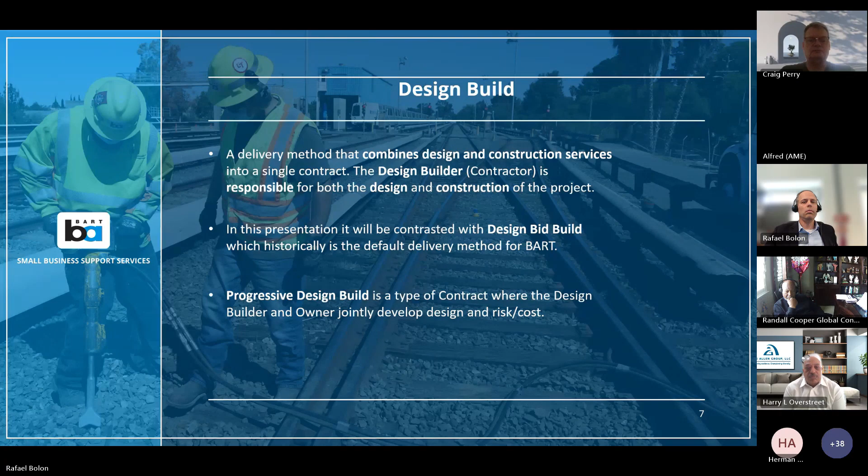At a high level, the biggest difference between design build and design bid build is the scope that goes out to be performed by the contractor or design builder. At the top, you have design bid build, a conventional timeline where design is performed, usually with a separate consultant, starting typically around 35% all the way through issue for bid. That support might extend further through bid and award and even into design services during construction, but there's a break when it goes into bid and award. For design bid build, these are typically hard bids, sealed envelope type bids, where it goes to the lowest responsible bidder, and then you have the construction phase.

So this is the model that we're all used to. Below is the design build model, where design may only progress to no more than 35%.

Now, that could vary depending on the subtype. For instance, at BART, there are certain elements, particularly in communication and train control, where the interfaces are specialized, and therefore the design might extend up to say 65%. But much further than that, and you lose the benefit of a design build, and it just becomes a design bid build. So somewhere around 15 to 35 design, a longer bid and award.

If you look at the orange bar below, it's actually longer in the second one. And that's on purpose, because in this model you typically have a two-stage process. You'll have a best value or pre-qualification phase, and then you have a BAFO, a best and final offer phase, where the owner negotiates on price.

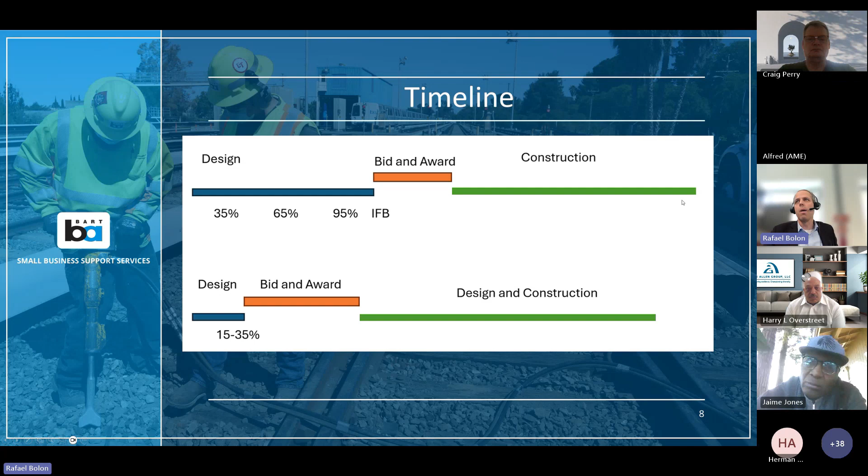And then, of course, the green bar is longer because it includes both the finalization of the design and the construction. Those are not start-stop; there's some overlap that is implicit in this design method. The punchline, though, is that if you look at the bottom, it ends sooner. That's really the main driver for why owners do it - it's a schedule-driven advantage.

So let's talk specifically about progressive design build. How does that differ? In progressive design build, the owner will bring the DB firm in early to assist with the design. In the conventional design build, the owner hires an outside consultant to take the design through the 35% phase, let's say, and then hands it off to a design builder. In progressive design build, the DB is involved earlier, and it's an iterative process with the owner to actually develop the scope and also typically the budget for those packages.

So the added advantage is that you get input as to where those risk areas are, not just from the owner's perspective, but also from the constructor's perspective. Ideally you get better alignment between the price of these packages and the scope, but it also allows more flexibility to the owner if they're not actually sure what the design is going to look like - this model gives them that advantage.

So then you have two packages. You have a pre-construction package, which is essentially the owner hiring the DB firm to take the design to some point. And then you have a final series of packages, which would be the actual construction. Whereas in the conventional model, it's one contract that would span both design and build, as we showed before.

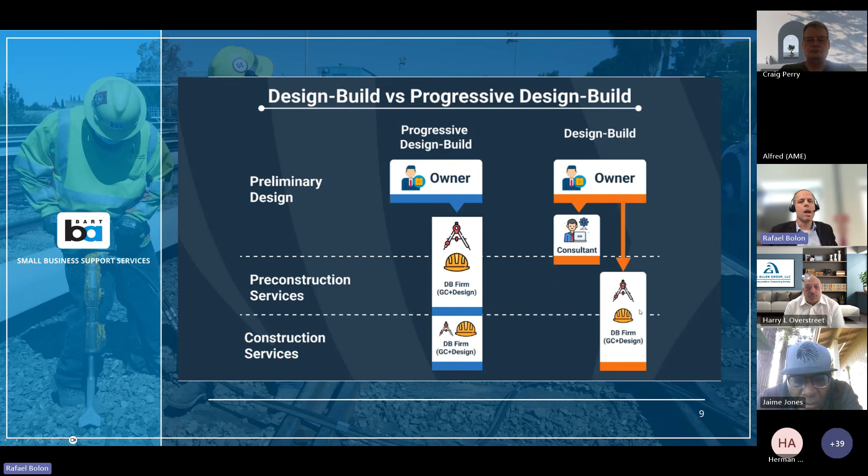So why would owners do it? The main one we talked about is schedule. If you look at the total life cycle, design build can be, or is intended to be, quicker than design bid build. You have to look at the whole life cycle - if you just look at the design build contract itself, by definition it's not quicker because it includes design elements. But if you look at the life cycle, that's the main advantage.

Cost, sometimes - and we'll talk a little bit about why sometimes - but in general, contractors typically have better, faster, smarter ways to do things. And so their means and methods can be incorporated into the design in a way that they can't on a hard bid. But the reverse can also be true.

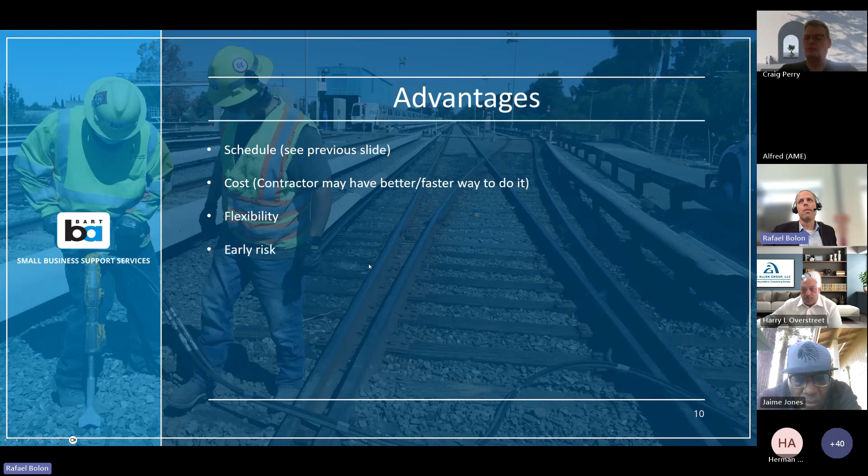We talked about flexibility. In particular, in progressive design, it allows a lot more flexibility in the design. The owner doesn't need to know on day one what they want; they just need to know what they want to achieve. And then they'll work with the design builder and the consultants to try to develop that. And then we talked about risk identification - again, this is a progressive design build specialty - but by identifying those earlier, you can work with the funding to develop separate packages of risk, or even tie your risk register to your budget better than you do in design bid build.

So for the rest of the presentation, I'm really just going to focus on the so what - like, how does this make my life different as an aspiring BART consultant? I'm going to focus on the processes that we do here at BART, on the CM, DSDC, design, etc., and talk about what is different about working in a design build environment versus a design bid build. Remember that the contrast is always back to the conventional. I'll go through some examples, and then we'll have time for questions at the end.

So the first and most obvious one we've chatted about, but just to say it because it's there - obviously the overall scope for the consultant is different. There's still a design element, a pure design element, where the owner may require an outside designer, but remember that's only typically 15 to 35%, sometimes as much as 65% for specialized scope. There's still a need for CM, for construction management, and this would be through the life cycle of design and build.

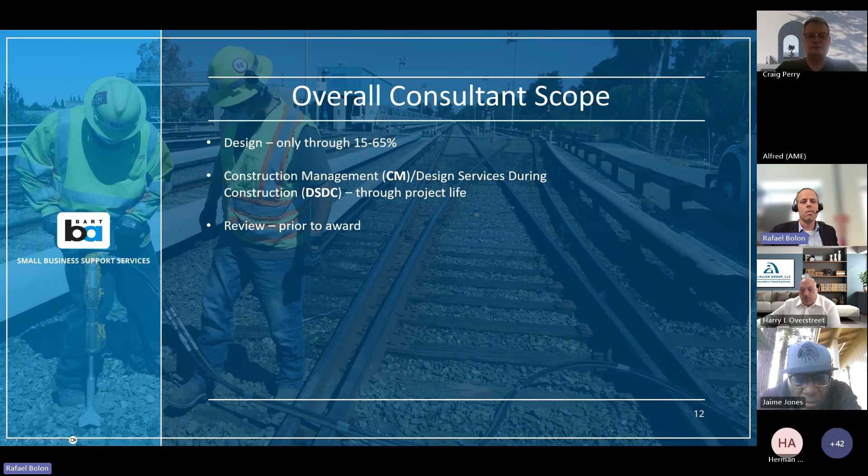So a little bit different from where it's bifurcated. Likewise with DSDC, design services during construction, the owner still has need for a representative to respond to submittals and RFIs, et cetera. BART is moving more towards a model where they have a third consultant come in to do review. That could be any version of the above - it could span just the beginning portion, the whole phase, or go through the bid and award phase. There's different ways that could happen, but that's a new thing BART is really pushing, so be aware of that as well.

So let's start with the pay process. Overall, the pay process on DB is the same - you have monthly invoices that come in from the contractor, you have to look at what they did that month, make sure it's in a correct format for BART payment, and get it through the system. What's different is because the scope wouldn't necessarily be known at award, you tend to see more lump sum values than in design bid build. So it's incumbent on us to break those down into smaller chunks, and we'll talk about that in a second.

There's also going to be payment for design type items. Most of the time we're pretty good at doing estimates for things like concrete and rebar, but it's trickier when you get into design items, because now you're talking level of effort type stuff where a lot of the work may have happened before you actually see a deliverable. Even more so, items like project management or mobilization really are level of effort type stuff - they're more time based than thing based.

Some items in design build might be unit prices. It's not uncommon that an owner will put out an estimated quantity - for instance, on my contract we have estimates of conduit, so those are just plug numbers where you assume 5,000 feet of this type of conduit. That's relatively easy to track because it's on a linear foot basis. But most will be lump sum, as we've talked about, and they may also include items such as quality or PM that will have to be worked out, whether time phased or thing phased.

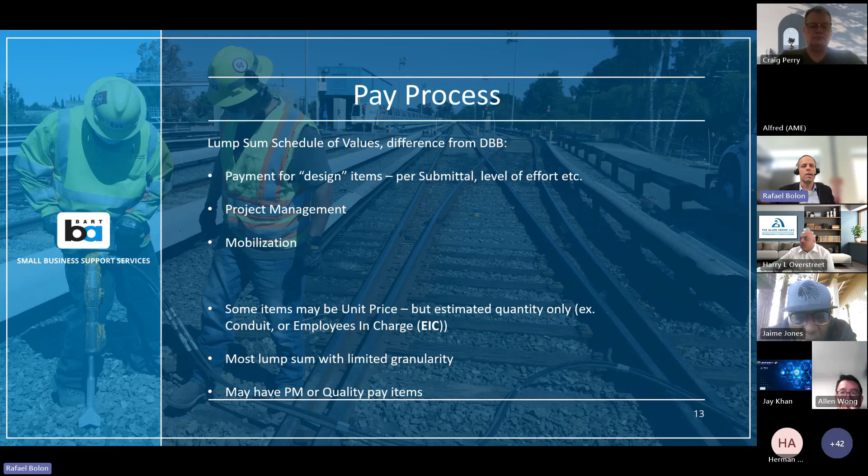So as an example, I mentioned how these are typically lump sum. Here's an example from a project I'm working on at BART right now, where we have a single line item which is really just installation of equipment in a train control house - just one number associated with it. But in reality this is going to get broken down into subsets: the location of the house, the type of work being performed, the phase on the project. The order of those three could vary, but in general, where it is, what it is, when it is are the three things you'd use to break it down. Here's an example where we broke it down based on locations, and inside this there'll be another level even below that where we start getting into the type of equipment. So it starts at a relatively high level but very quickly becomes much more granular.

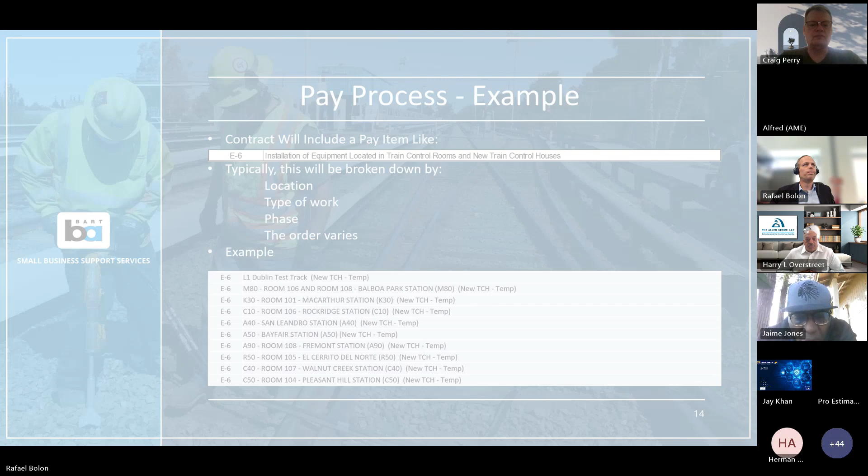Another big differentiator is quality. In design build, typically the design builder is both the quality control and the quality assurance. This is a marked difference from the way BART runs design bid build, where the CM would be the quality assurance and the actual contractor would be the quality control. So there's still a role for consultants in this situation because someone has to oversee that and ensure it's being done right. There's also typically audits that are performed, and sometimes those audits even extend to the BART team - we might do self audits, as we call it, and make sure we're doing things right. So there's still a role for the CM to monitor and provide oversight.

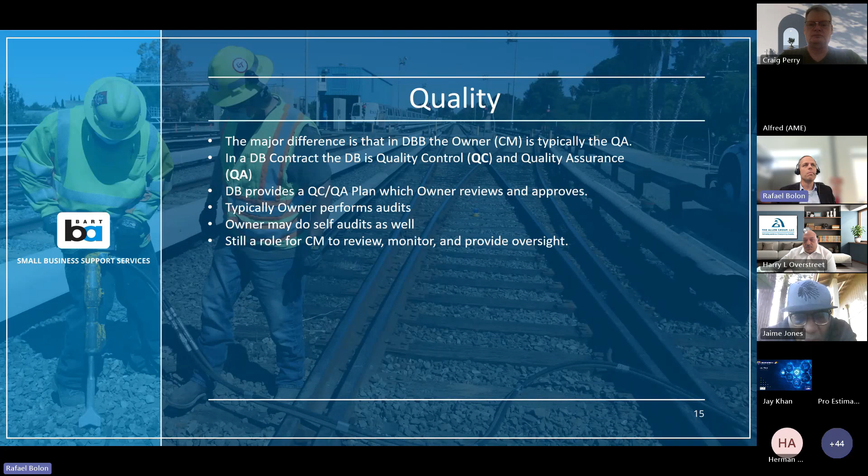So as an example, I listed the takeaways in terms of type of work that would exist in the quality sphere given that breakdown. Even though the DB produces the overall QC/QA plan, someone's got to look at it and make sure it's good, because that's the thing we're going to build off of. There's a design review, and stuff in the field - I'll use the example of concrete where there's a QC role, but there's also typically a QA role in terms of casting cylinders. Someone's got to ensure that happens and is done correctly, up to and including maybe some field verification, so there's some opening for field review as well.

We may do oversight to confirm that QC and QA are doing what they're doing. Both the consultants, BART, and the DB can issue NCRs. So those processes exist and require consultant support. And then, as I mentioned, there's audits—self audits and external audits—just to ensure everybody's doing what they're supposed to do.

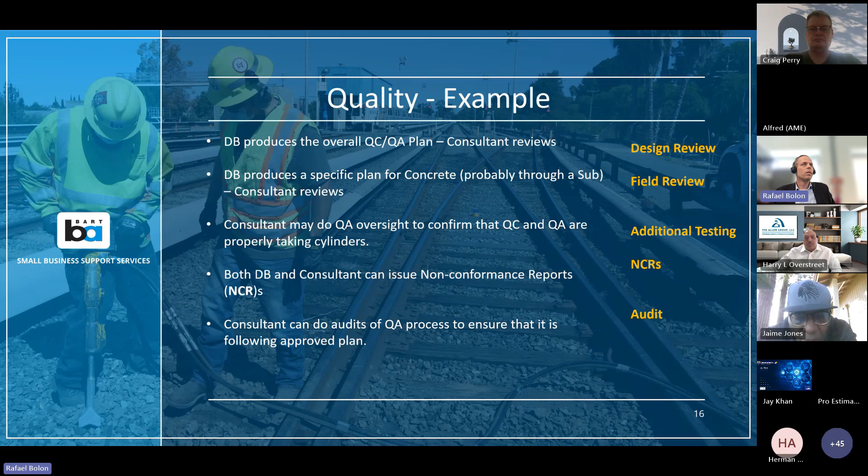So let's talk about the change process. That's another really big differentiator. Two big differentiators, actually. One is because now you have both construction and design work, there's really two sets of BART provisions for changing the contract.

There's the one most of us are probably familiar with, what some people call force account, or time and material is another way people refer to it. That's a very prescriptive set of specs in the GCs that tell you what prevailing wage is, what the prescribed fringes are, what the allowable markups are. These are all very standard things.

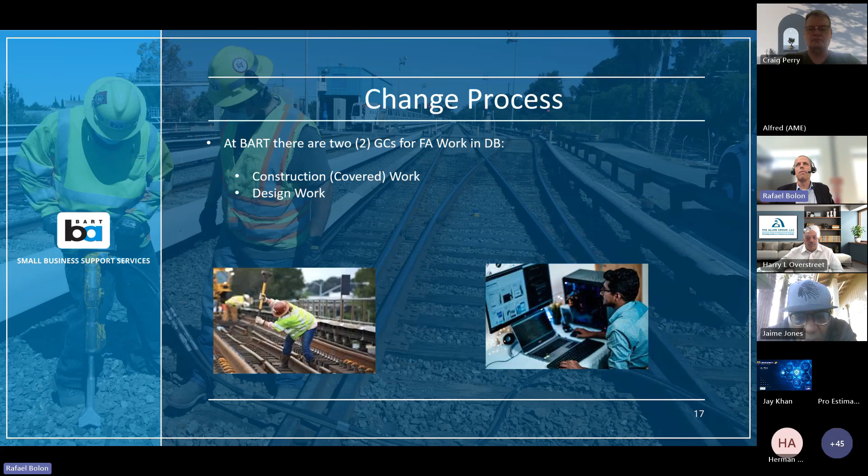When it comes to design work, it's more complicated—not the least of which is because we're typically not in a designer's office with a stopwatch counting them, as we would be out in the field. So that's just a differentiator.

The other thing is, remember how a lot of these items are not going to have specific quantities at bid day? You're not going to have a set of plans day one that tell you you have to pour 5,200 yards of concrete. You're going to have a performance-based requirement that there be a footing sufficient to hold this equipment. Only later will you know that it's 5,200 yards of concrete.

And so changes are trickier. If you add something, you're not going to be able to just do a takeoff and see what that add is. So changes in quantities are less common, and changes are a little harder to quantify than they are in design bid build.

That extends to the very definition of a change. In general, design build specifications, when properly created, are performance based. So essentially, BART is saying what they want, not how to do it. And that's on purpose, because that's what they're paying for—they're paying for the expertise to translate that into action.

But they have to be very careful, because if I, as an owner, say that I want a four-wheeled vehicle, I may be thinking of a Chevrolet, but I might get a skateboard, which is also a four-wheeled vehicle. So changes are trickier, because you have to really understand what the contract required, not just what you wanted, and then see if this is a change or not a change to the contract.

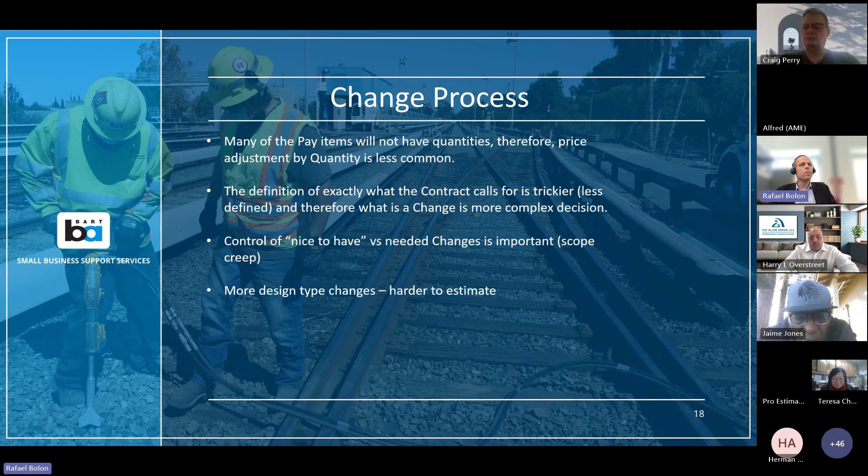So here's an example, right? And this is on a systems-based contract, which makes it even trickier, because in systems-based contracts, a lot of the upfront work is behind a curtain. So again, much closer to the designer behind a computer screen than the pouring concrete model. So in this model...

It's often useful to break those change orders into two. This is something I've used successfully at BART, which is you do a not-to-exceed change for essentially advancing the design to a certain point. And then you can do a lump sum change order for the agreed scope once you have it. So this works when you know there's a problem, but you don't really know what the solution is.

And then this is another one that I've used. This wasn't at BART, it was at another railroad, but a similar idea - we had a design build where we had, in this case, thousands of foundations for an overhead catenary system. We were switching from a diesel to an electrified system, and as you can imagine, you get all kinds of issues with the footing, where the soil is soft, soil is too hard, what have you. So we came up with predefined or grouped solutions. So in the case of footings, you could say, here's a pre-approved solution with a casing. Here's a pre-approved solution for tight access, where you have a different type of footing. And it won't catch everything, but in many cases, if you agree up front, the time is generally more expensive than the cost of a little bit of extra concrete.

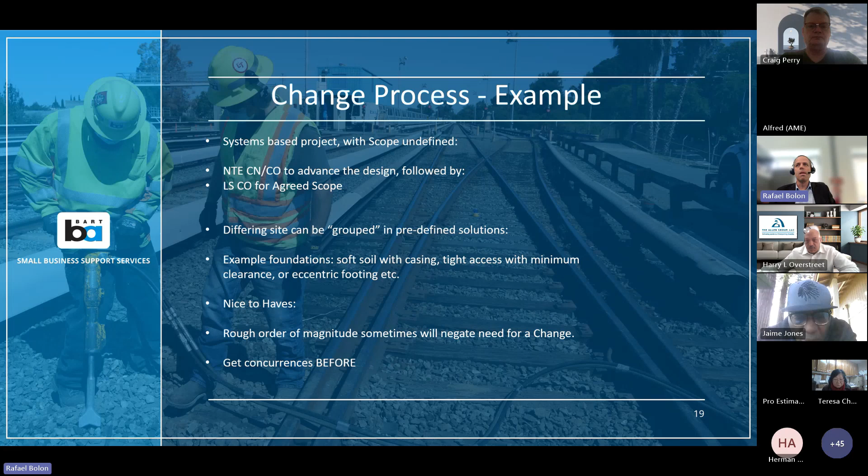Submittals - the big difference there is that submittals are not going to all be listed. They're not going to be all called out. You probably don't even know where all the submittals are. Secondly, the submittals will have different levels of completion. So in a design bid build, you typically see the submittal once, maybe make comments, then you see it again and you approve it and you move on. In design builds, you're going to see it at various levels - it could be 35, it could be 65. That's a big differentiator, and we'll talk about that a little bit when we go through document control. It's an important part of making sure your documents are in order.

One thing to note is that depending on the model of who the design builder is, sometimes they have their own designer. Sometimes they'll have the equivalent of a GC, an AECOM, an HNTB, or somebody like that. In which case, there may be a lot more design changes than we're typically used to. So if the design builder controls access to the designer and not BART, then very often you'll see a lot of design changes trying to save cost. When it's their money, design builders are very aggressive with saying, well, shoot, if we can get by with 3 nails, why would we put 4 nails in? Because they're not necessarily bearing the construction cost. So something to think about.

And then a big thing that I mentioned before is that the advantage of design build is that you're advancing these at different levels. So you could be at 15% on your landscaping and 85% on your design, and actually be building some of the physical elements, and that's okay. So you just need to be able to track the various levels. And they may be proceeding with that. So you just have to always be cognizant that it's not a finish 100% design and then start construction.

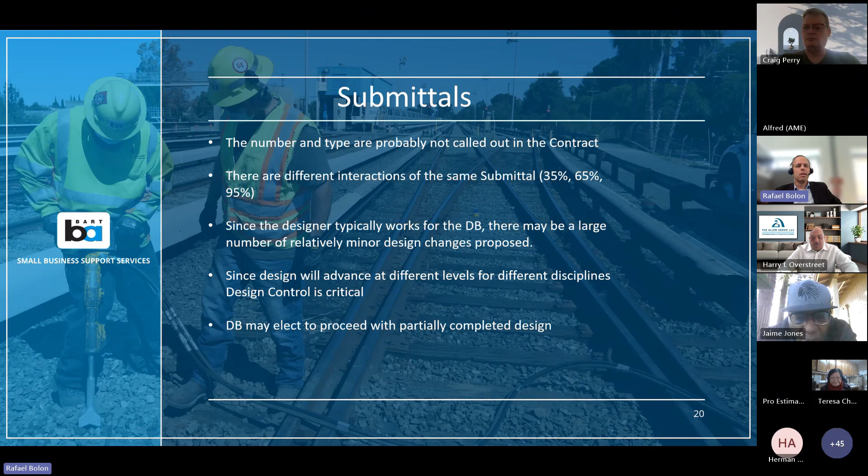So some examples, one would be fiber optic, because many times the fiber optic backbone could be known, but the actual things you're plugging into could still be worked on. And quite frankly, it doesn't matter, right? So it's quite possible that you could be installing miles of fiber without knowing exactly what's going to travel through that fiber, and that's okay.

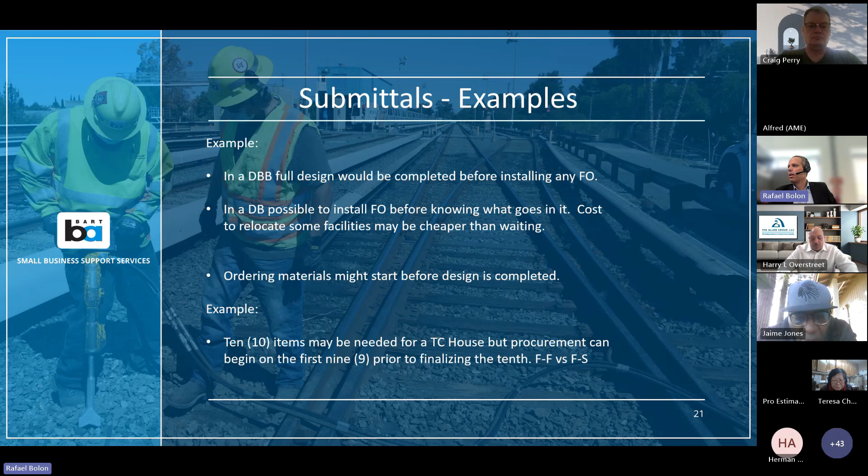So you can order material before the design is complete, as long as the design builder is confident that the design isn't going to change that. One example would be train control houses. You may have 9, 10, 27 different things that are all required, and you could be ordering most, but not all of those, and wait on what we call in scheduling a finish-to-finish versus a finish-to-start type of situation to keep that schedule going.

So let's talk about RFIs. That really gets into the scope question again that came up before, and I see some questions in the chat about that as well. It's trickier because the scope isn't as easily defined. Normally, one of the big purposes of an RFI is to clarify the scope. So, sheet C103 detail 2 shows a dimension of 12 feet, however on detail sheet blah blah blah it shows 11 and a half feet, please clarify. You're not going to get those kinds because that level of detail doesn't exist.

So the RFIs on Design Builder are more about what you can do versus clarifications of design. They have an intent and they're trying to match what the owner's asking for, and they're just trying to align that. There's also this thing called a gap process, especially true on system type projects where the design builder is essentially providing a system, and the system mostly but not completely aligns with what the owner needs, then you're going to end up with these gaps, and you have to resolve what you do with those. Can you accept certain gaps? Can you change order certain gaps, or do you have to change your base product to make that happen? So those are another big source of RFI.

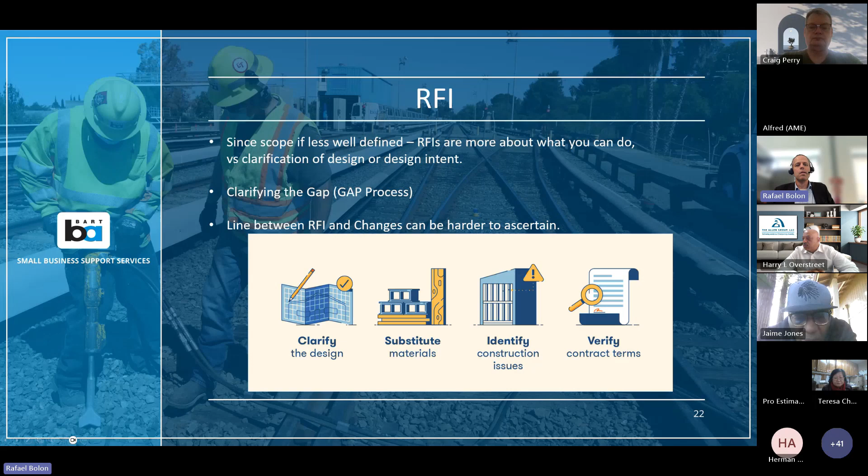But the warning I would give everyone here is that the line between RFIs and changes can be harder to ascertain, because you're not simply asking for clarification. You may really be asking for a change order and just not calling it that.

And then the other thing is that because there's less information available at bid and more of the exploratory stuff is put on the design builder, some of your typical RFIs, like 'can you confirm if there's a water line there' or 'who owns that water line,' might not be a BART question. It actually might be a design builder question. So you've got to go back to the contract and say, what does the contract say? Is it really my responsibility or is it the design builder's?

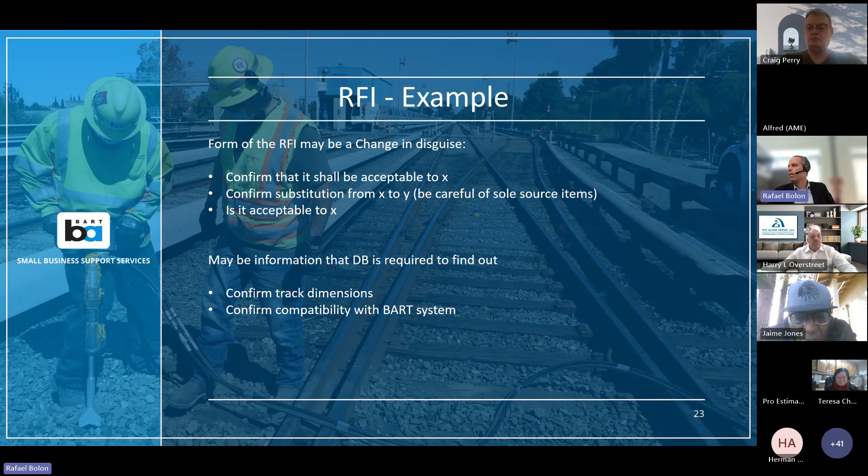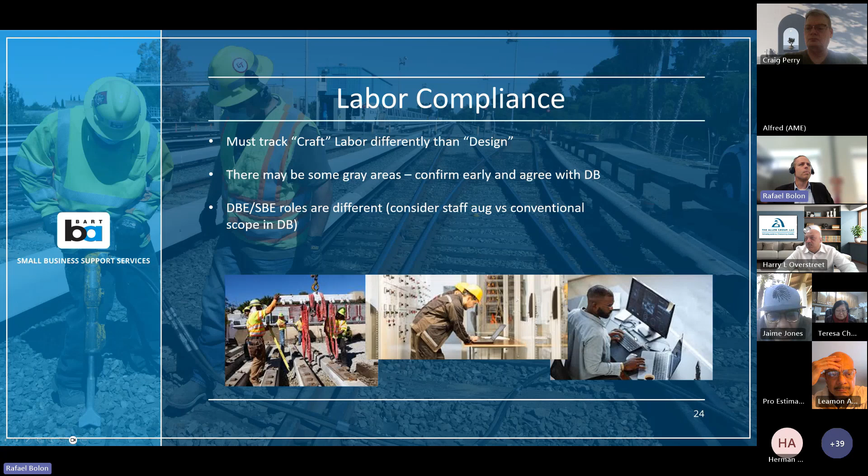So now I'm going to get into a little bit of BART jargon, so forgive me if I'm going too deep here. At BART, we have a form called an MUR, which is used to identify who did work out in the field. Labor compliance uses that to verify that primes are paying their subs, so it's a very important document. But it's targeted at that first bucket, at that craft labor.

So it's important that we know the difference between craft and not craft, and also in particular for that middle range. If you have an engineer on site, it doesn't automatically mean that's covered just because they're wearing boots. If the engineer is simply there to verify visually that the design they provided is being built that way, that's not necessarily covered work.

So just something to be aware of, because it's more complicated than in a design bid build where essentially everything that happens in the field is construction. So utilities - I touched on this a little bit, but in general, one of the biggest drivers of differing sites is utilities. They're where they're not supposed to be, they're not where they are supposed to be, they're different, they take longer to move.

In design build, more of the emphasis - and you have to read your contract - but more of the emphasis is typically put on the design builder to go out there and do their investigation. So why does that matter?

There are two types of differing site conditions in general. One kind is a thing that you told me is there that is not there, or worse, a thing that you didn't tell me is there. That's the typical one. But there's a second kind, which is a thing that is of a type or character that could not have been assumed at bid time. And that's a trickier one because it uses words like reasonable. It's that second one that you're mostly going to see in design build.

So the typical example for that would be geotechnical, but I'll try to use a utility example. If you have two manholes and you go out and do your investigation, you find out there's a storm drain that connects those two manholes - that's reasonable, and you should have assumed that at bid time. Manholes usually connect to things. But if you were in a BART yard and found a 60-inch fuel line going out to the airport that nobody could have reasonably foreseen, you could argue that that's a differing site.

So the timing of it is really critical - it's more expensive that later in construction you find it. The design builder has responsibility to do that advanced detection.

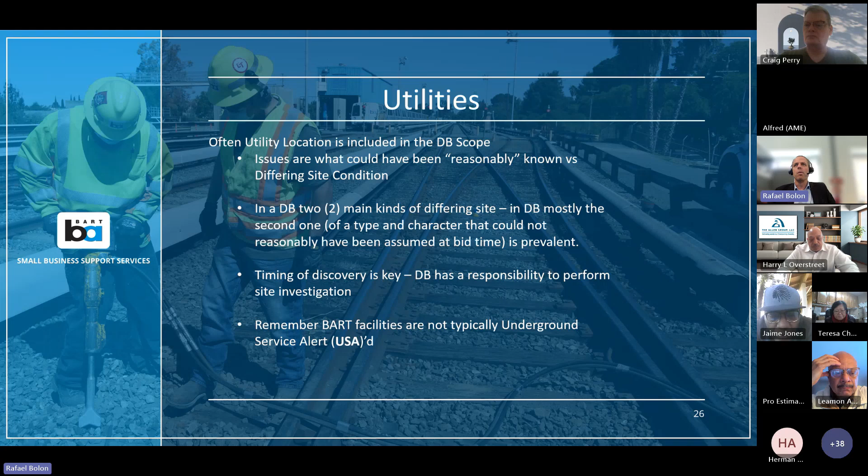And just as a reminder, BART facilities usually don't get those on a USA ticket, so just be sure that you work with BART as well to make sure about BART utilities, because sometimes there's nothing more embarrassing than finding all the other third-party utilities and then there's a BART one right there and you go, oh, whoops.

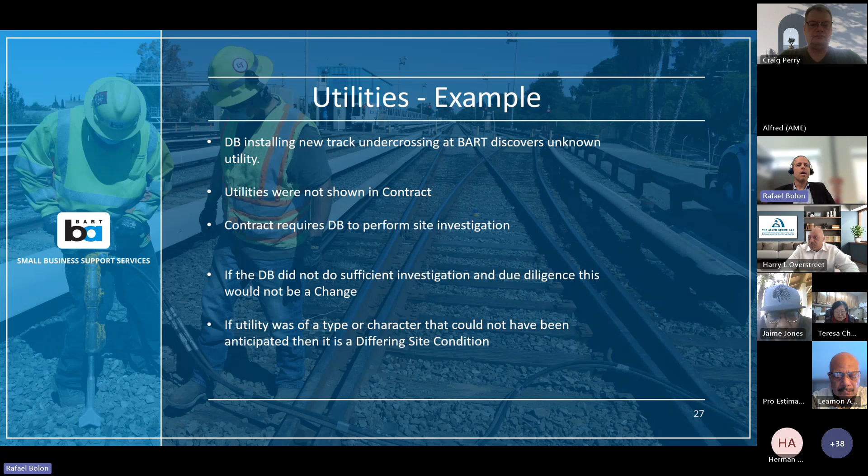So as an example, putting in an under crossing at a BART facility - this happened on a design build that I'm on - the utility was not shown in the contract, and the contractor came back and said, well, pay me. Well, in reality, the design builder was required to do a certain amount of investigation. They didn't meet the standard in that case, and so it was not a change order. If they had done sufficient investigation and due diligence, then that's a different question.

Document control - this ties back to some of the stuff we said before about the way submittals and RFIs are put together, but mostly submittals. Version control is really, really critical. It's always critical, but in design build especially so, because you have different phases of submittals. So it's critical that you know not just whether a submittal has been submitted, approved, etc., but also what level it is, because you could be building off 65% plans.

There's nothing wrong with that in a design build, and so you just need to know what's going on. In particular, everyone who's looking at it has to have the most up-to-date version of it. You need to be able to track those gaps between what is required and what is being provided.

And then a little bit on as-builts, because you're going to be building this stuff at all phases of the design. It's really important that we keep up to date on the as-builts, because it's not something you just punt to the end of a job, as often happens on design bid build. We have to be doing these as we're going.

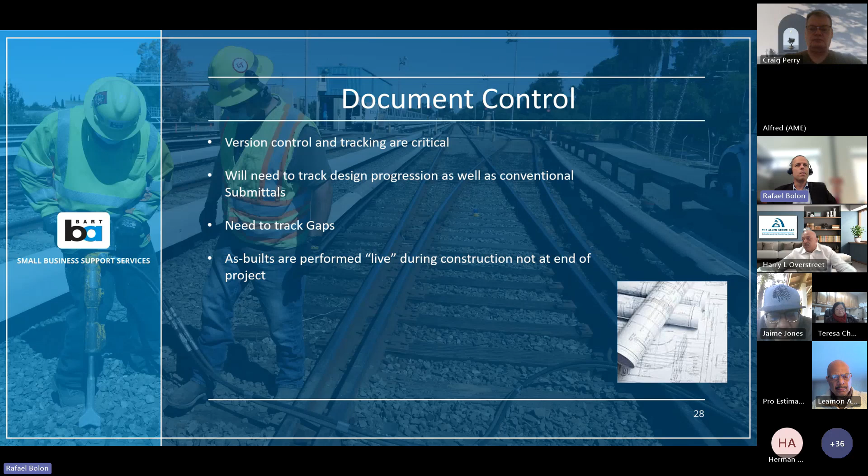So we talked about it. I think the biggest example is on submittals, right? You need a way to track in your document control system that you have 35, 65, not just different disciplines, but different phases. Because as we said, you can complete different levels of the design, right?

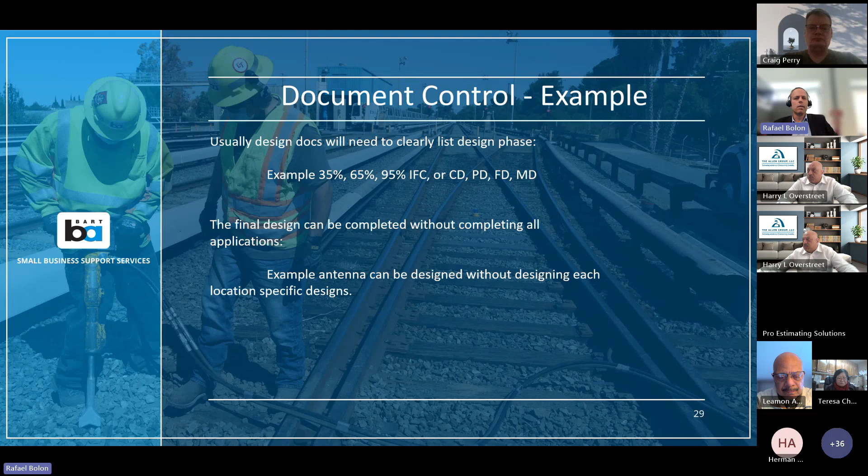An example would be, I've approved a design for a generic antenna with a generic foundation, but then the actual physical location, you may have additional design you need to do for that particular location. So it can be approved as a design concept, but there may be additional work that has to happen for different installation, and that's a dynamic thing, unlike on a design bid build where you'd have to do that via change order. So risk.

We talked about that a little bit with the progressive, where part of the advantage is to bucket these risks, right? So the biggest difference in risk, I would say, is that the typical differing site conditions that hold up a lot of risk in design bid build, those ones tend to be lesser because there's things that you can do about it through the design process to minimize that risk. Rather than being handed a completed set and say, here you go, Mr. Contractor, figure it out, there's things that you can do to minimize those risks. So those tend to be better mitigatable on a design build.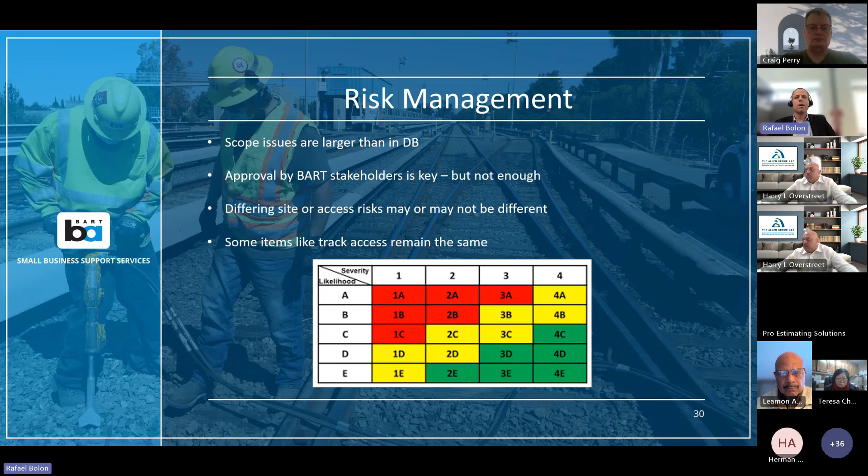The flip side of that is that scope issues tend to loom larger. And we're going to get into that a little bit with the way BART does it. But it's really critical that we have a tied risk register to those buckets, and those are identified early on in the design process.

So a BART specific example, this happens at every agency, but we're talking about BART here, is that for things that aren't wrong and aren't right, but come down to preference, in general, BART at the very preliminary level will have received this concurrence, if you will, from what they call internal stakeholders, right? So if you're building a crossover, you'll have got track and structures concurrence, you'll get RSNS concurrence.

But let's be honest, sometimes just because you've got the division chief's sign off doesn't necessarily mean the person who's actually going to be working on your thing agrees to it. So it's really important that you work with your stakeholders and make sure that the boots on the ground, the actual person approving it, is also on the same page. Because if not, it's just going to get more expensive later. So it's important that we communicate with them early and often, let them know what they're going to get, not in mumbo jumbo, but in actual concrete terms.

And then that we're also stewards of the scope, right? Because it's very easy to just say, oh, well, BART wants it made out of platinum, not out of plastic. Well, BART may like platinum, but platinum is a lot more expensive than plastic. And so we need to explain to them that while we're able to facilitate that, we don't recommend it because it costs a lot more and it's really not that much better than plastic. So the key out of all of that really is communication, shepherding the scope, communicating with your stakeholders, and making sure that that process works.

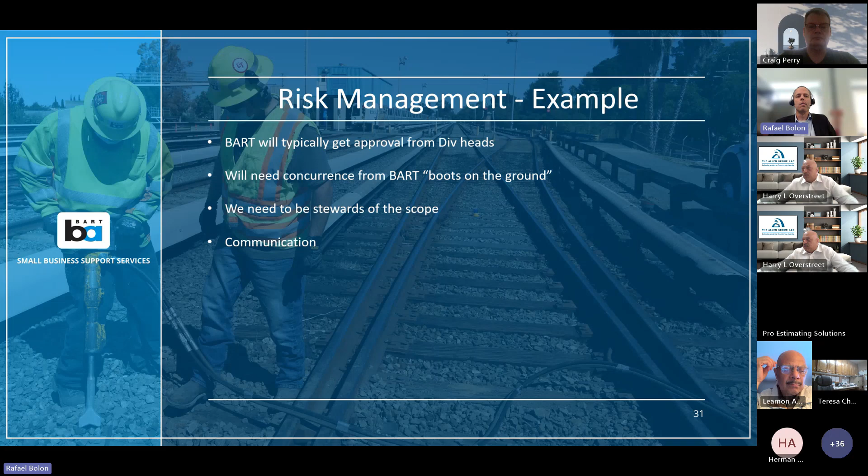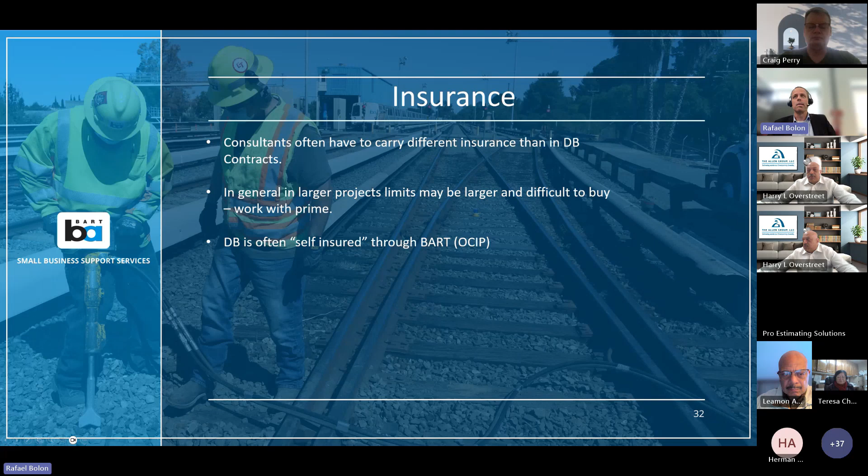Insurance. A lot of these big design build contracts, or even the smaller ones, have larger limits and also require consultants to carry insurance that we typically don't carry, right? So if you're a designer, for instance, you might be asked to carry general liability for construction type work. You might be looking at very high E&O limits. And also on DB contracts, BART is moving towards this model of self-insurance where they have this program called OCIP. So that's something to consider as well, where you may have to have health and safety insurance.

So in my experience with this, I think the biggest thing, and I should say that I'm presupposing that you're not the prime, you're a sub. The biggest thing is to discuss this with your prime, right? So sometimes you can exclude certain coverage if you can convince all parties that you're just not going to do it, right?

If you're a designer, you don't need to go out in the field. Sometimes if you say that and get the prime to sign off on that, the prime will cover you, so you don't need that insurance for something you'll never need. You can purchase umbrella coverages that are site specific to BART. It's cheaper than upping your overall coverage if you're working on multiple projects at a time. But I think the best thing to do is work with your prime, see if you can limit those coverages.

E&O is a classic example. It's very difficult to get $5 or $10 million in coverage for a small firm. So I would work with my prime and try to limit that based on your scope, if that is something you're concerned about.

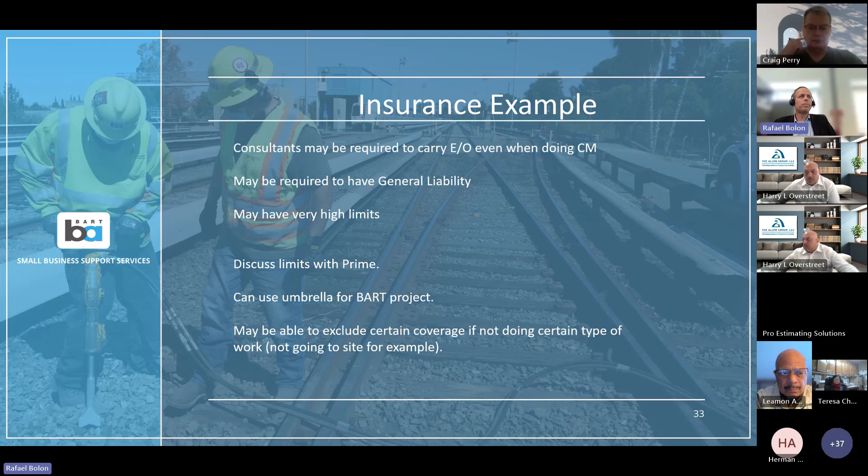Okay, let's talk about inspection. The biggest difference between inspecting a design-bid-build and a design-build contract is the level of inspection required. Remember, in this scenario, we're not the quality assurance, and the design builder is responsible for the product at the end of the day.

So BART still wants people out there. They want to make sure things are done safely and in conformance with the relevant SSWP, but we don't have the same level of responsibility in terms of assuring the work that goes on the ground is the work they paid for. It's also important that we're looking at the most recent design information. Remember, you could be building off a 65% plan set, so it's really important that the person physically watching it is comparing it to the most recent design. Otherwise, you're looking at yesterday's newspaper and it's not helpful.

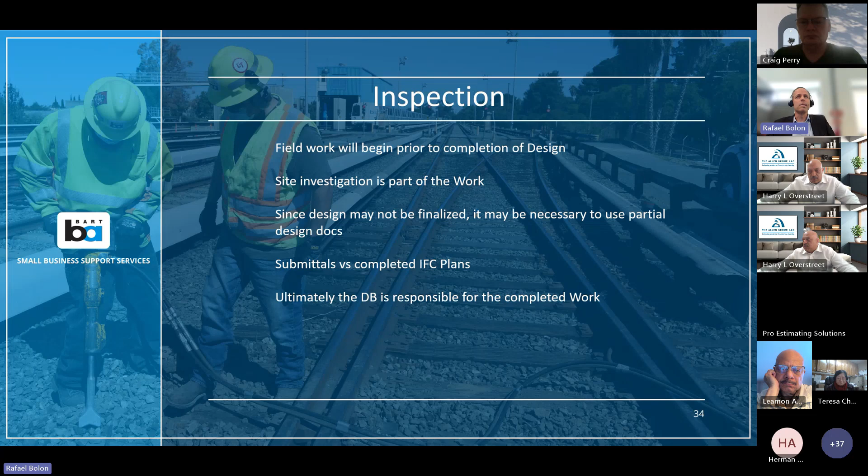An example would be on quantities. Remember we talked about how the quantities may not, and probably are not, going to be overly laid out at the beginning of the job. So in this case, while we can track what was performed, we can't really track it against a plan per se. What we can do is make sure there's an accepted, approved SSWP and that the work is being performed in accordance to that, including whatever safety elements they have, that it complies with BFS, with the BART standards, and quality oversight as we described, but not quality assurance.

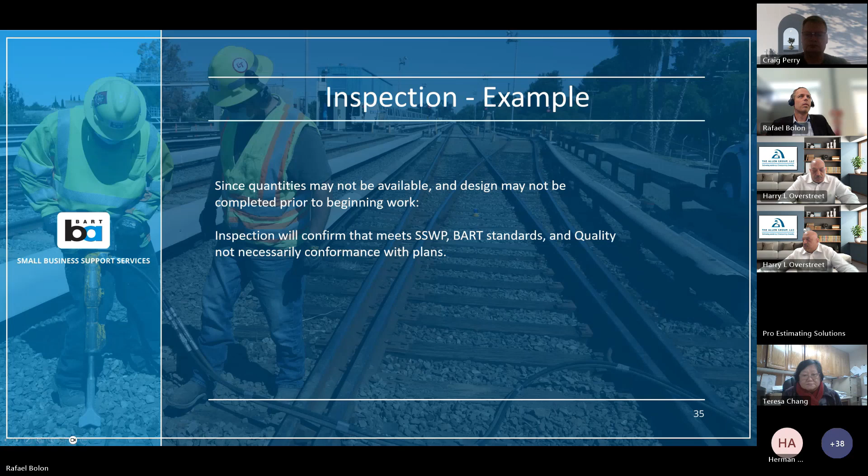Let's talk about real estate, permits, and things like that. This is very similar to the situation with utilities — one of those things that can slow construction contracts down. Again, it's not the getting of the permit, it's not knowing that you needed a permit and then having to wait 6 months while you talk to Caltrans or whoever else is the permit holder. Similar to utilities, a lot of the responsibility in this case is transferred from the owner, in this case BART, to the design builder. So theoretically, the design builder should have gone out and sought some of these things.

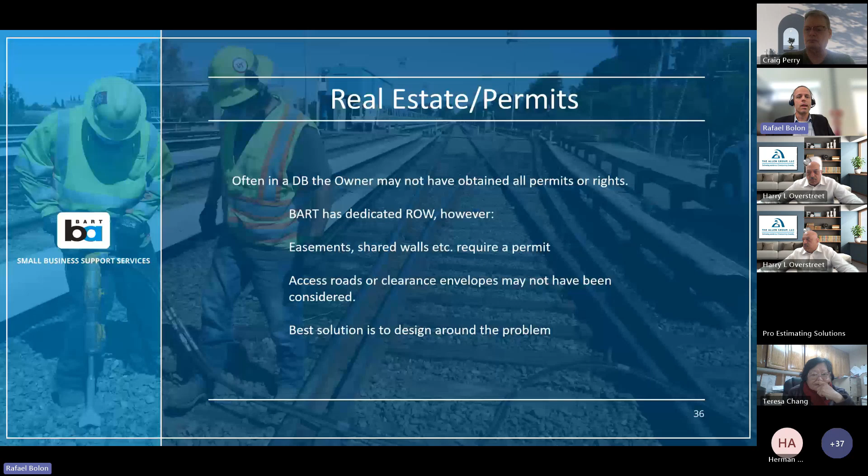But in many cases, these agencies are not really going to be talking to a private entity — they're going to be talking to BART. To be clear, I'm not just talking about actual property takes, which are fairly rare and usually identified early, but things like construction easements, access roads, even aerial easements. Sometimes you don't know what you don't know till you know it, and then it's often too late at that point. So my simple advice is: don't do it.

If there's a way to design around a permit, it's almost always cheaper than trying to go through the permit process. No one will ever tell you a permit's going to take a year and a half to get. They'll tell you they're going to work with you, that they're going to be good partners and get it done in 3 weeks — and then 3 more weeks, and then 3 more weeks.

Permits are like delays on airlines, right? They never tell you the flight's delayed 5 hours — they tell you it's 20 minutes, 20 minutes, 20 minutes, 20 minutes. That's how you end up with a big fat delay, and then you go back and say, 'holy smokes, how did we have a 3-month delay on this job because of a permit?' That's how you had a 3-month delay.

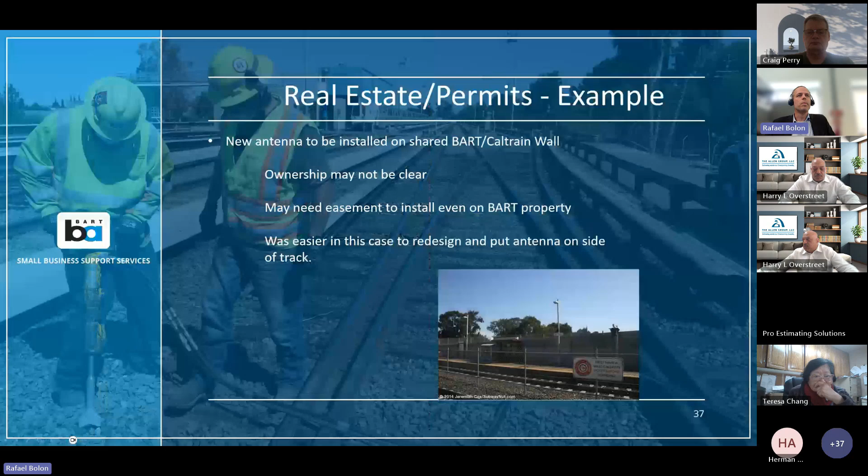The best way is just to not do it. For example, you can see that block wall over there - this was a recent example. The property line wasn't well defined; it goes through that block wall. This is very common in property, you'd think the world would be better divvied up, but it wasn't clear who owned it. So it came down to whether we had to get a permit, etc. At the end of the day, we simply redesigned and put the antenna on the other side, much cheaper than going through it. That's my recommendation.

SSWPs are always a big thing here at BART. Not fundamentally different - it's still our job to get multiple SSWPs to work with the team here at BART to make sure it goes through.

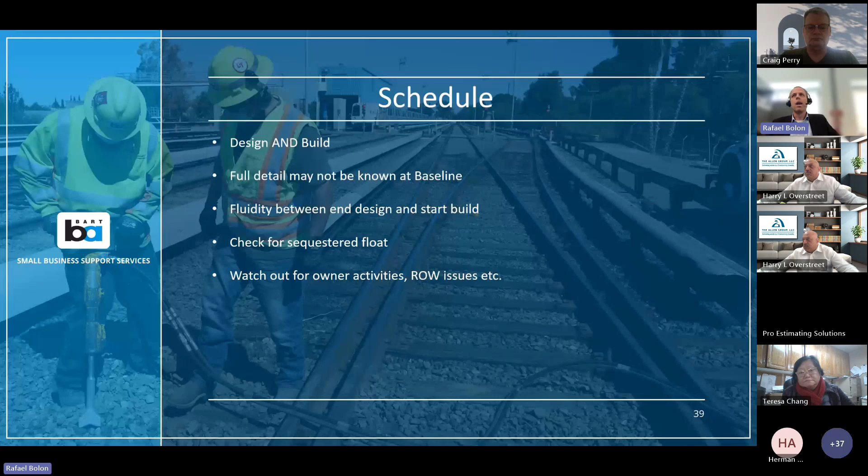The tricky part is there's more fluidity between the end of design and start of build. In particular, when looking at the schedule, in addition to that overlap, you might have activities that aren't fully fleshed out yet. It's not uncommon to have a big block of activity called phase 3, which you'll break into detail later once you know more about phase 1 and phase 2. So that's the biggest difference to the schedule - it contains both design and build, and all the detail may not be available on day one.

We've talked about this a bit, but the design builder might not be a builder per se. Why does that matter to us? It matters because some of the stuff we've talked about - changes, pay process, all this kind of stuff - we just assume our counterparts will be fluent in this, and they may not be. So that means we just have to work a little harder on our side to familiarize them with it, work with them, and make sure they're following the process correctly.

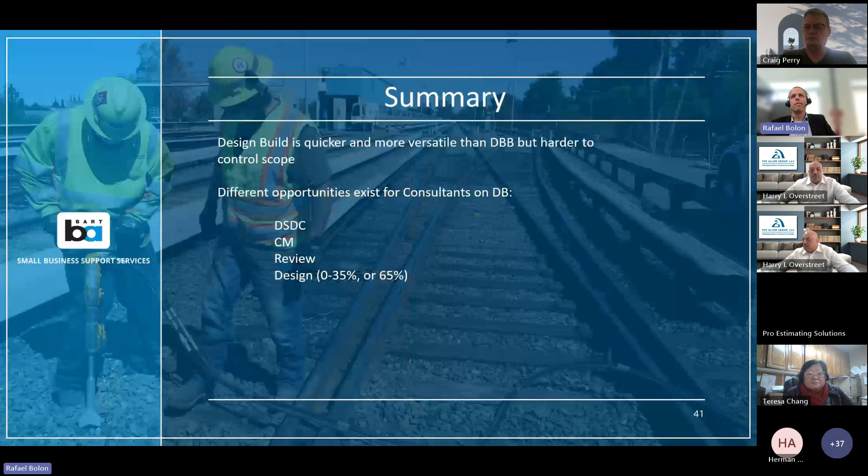So let's summarize. Design build is a process which is quicker and more versatile than design bid build, but it's harder to control the scope. There are different opportunities that exist for consultants on design build - DSDC, CM, review, and even core design are all available. They're just a slightly different format than they would be on design bid build.

The processes for things like pay application, changes, labor compliance, insurance, and so on are different, and fundamentally different because there are two types of work on a design build: field work and office work, and those two are treated differently. That's why those processes differ, but also fundamentally because the scope is not fully identified at bid day, and because of that there's more ambiguity into what's going on. That's why those processes differ.

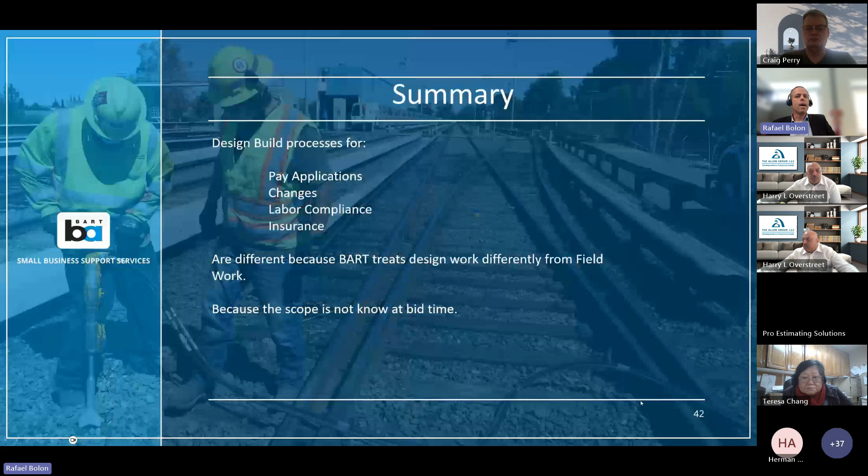Quality, as we've talked about, is different because the role of the design builder is different - it covers both QC and QA. Still a role for the consultant, but a different role. The utility and right-of-way permit process is different because more of the risk is put on the design builder, so more of that is actually part of the contract. It's less about receiving a 100% plan set and then issuing differing site condition change orders, and more about the design builder doing their due diligence and making sure they can work around the process. If you can work around the problem, it's always cheaper than trying to move the utility or get the permit.

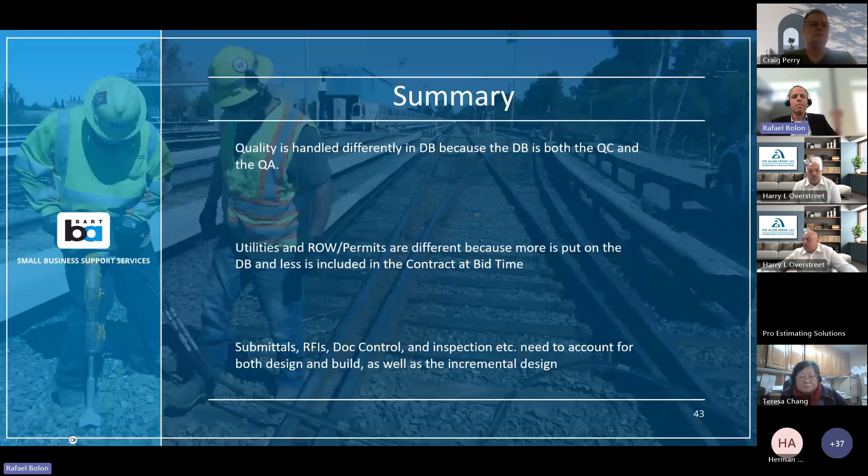There are challenges, and some of the big ones have to do with scope. A big one, always an issue on contracts but more so on design build, is the difference between a nice to have and things that are really required. So now we're talking Lamborghini versus Chevrolet - do you really need a Lamborghini, or does it just look really, really cool? The DB may not be a builder, so there are challenges with how much experience they may have.

You'll have multiple SSWPs to deal with at a time - this can be true on design bid build as well, but it's always a challenge here at BART. And the schedule is typically accepted prior to fleshing out the full detail, so there's more buildup, if you will, of the baseline rather than just day one baseline acceptance.

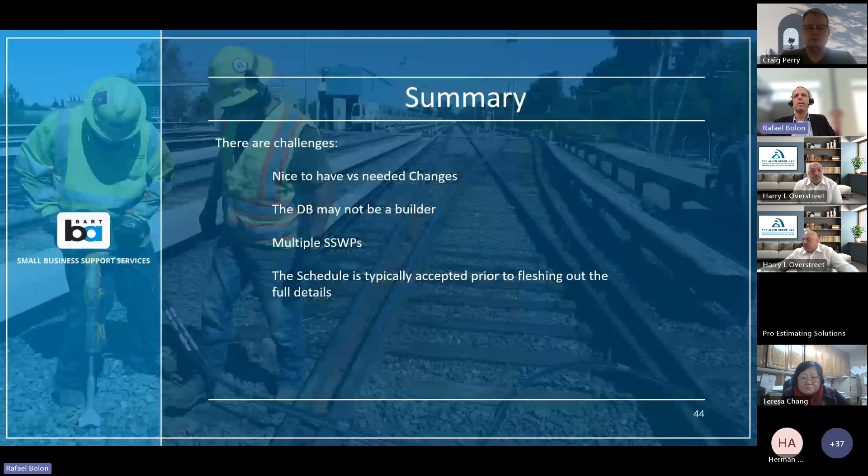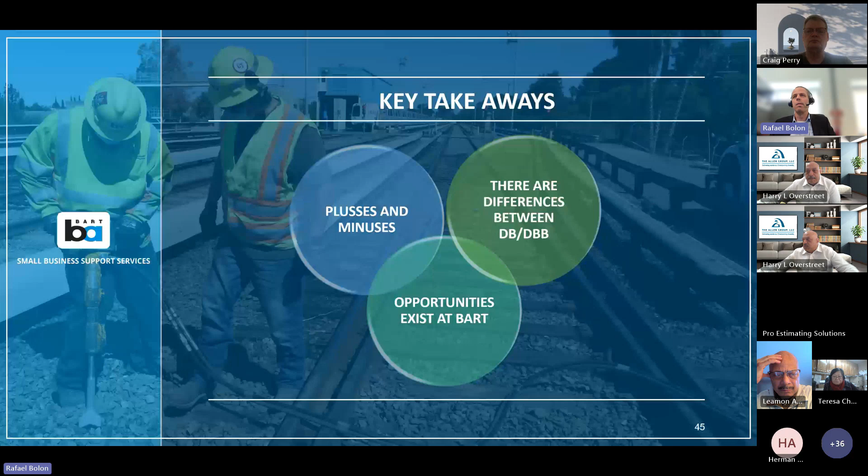So if you just take three things away from this: first, there are differences, functional differences between design build and design bid build. Those differences are not uniformly positive or negative—there are some pluses and some minuses. But although different, opportunities still exist at BART to do all the core types of work we've typically done, whether it be CM, design, or construction. Those all still exist in a design build environment, just slightly different, and it's important we understand those differences if we're going to work here at BART.

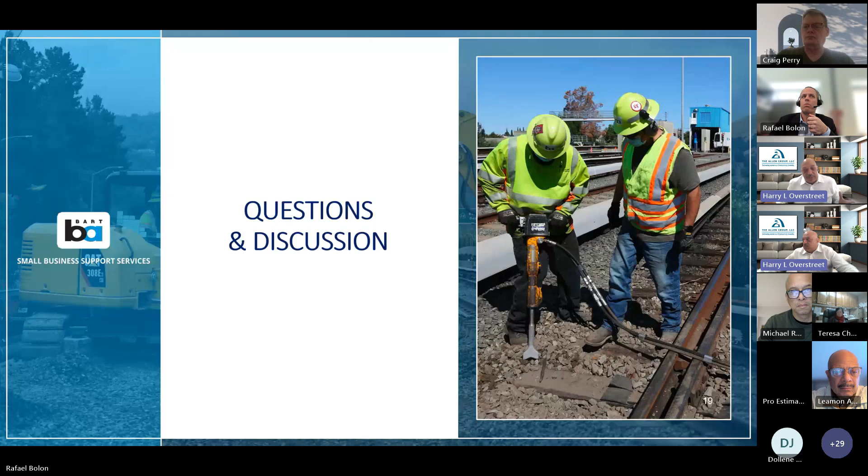I see, again, that's an excellent question. Please send me an email and I'll relay that over. Off the top of my head, I have no idea. This workshop doesn't have specific information about the police headquarters project, but we have contacts within the Office of Civil Rights, so I'm happy to relay those questions over. Absolutely. Are there any other questions?

Okay, well, I think that may complete our webinar for the morning.

Thank you. I see a lot of people, well, not everybody tuned out. So yeah, great job, Rafael. Thank you, great job Rafael and Harry, great job running this today. Appreciate that, thank you. Yeah, Michael, thank you guys, all right.